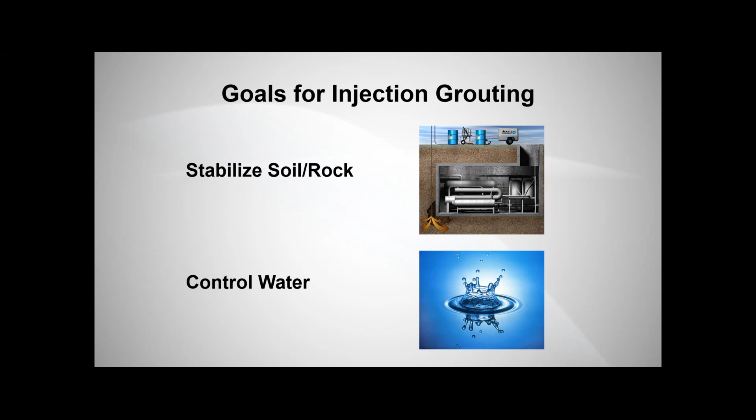What are the goals for injection grouting? When we talk about injection grouting or grouting for water control or stabilizing soils, a lot of the jobs get in a lot of different aspects, whether you're controlling groundwater in a break-in, break-out on a shaft for a TBM, or if you're controlling groundwater on a shaft advancement for a mine, or groundwater in a manhole or a wet well or a basement underground parking garage. There's a lot of different projects that grouting gets used on, but when you boil down to what the ultimate goal is of the grouting technique or application, it comes down to either you're stabilizing the soil and rock or you're controlling the groundwater. So it really helps you understand what the injection grouting process does and what it accomplishes.

What are the injection grout families? Well, the primary grout families consist of cementitious grouts. That's your ordinary Portland type 3, or type 1-2 also could be considered a cementitious grout. Ultrafine grout is another family within that, and we're going to go into a little bit more detail on each one of those. Then you get into solution grouts, which is what I'm calling what people call chemical grouts, but solution grouts are the industry term which we're going in that direction.

These are the polyurethane grouts, one part of the subset of the solution grout family. Within the polyurethane family, you have a hydrophilic and hydrophobic. And what differentiates, real quick, between cementitious grouts and solution grouts is particulate versus non-particulate, if you will. Cementitious grouts have particles. Type 1-2 could have anywhere from 75 to 100 micron size particles. Type 3, 15 to 20 microns. These range a little bit. And ultrafine grouts, anywhere from 3 micron average up to 8 micron average, depending on if you're looking at an ultrafine or a microfine, and as low as 1.5 if you're looking at a superfine. So again, particulate grouts for cementitious, solution grouts non-particulate.

So to continue on within the family of solution grouts, the other subset, as that tree branches down in the family, the chemical reactive grouts - the acrylamides, the acrylates, the acrylics, and the sodium silicates.

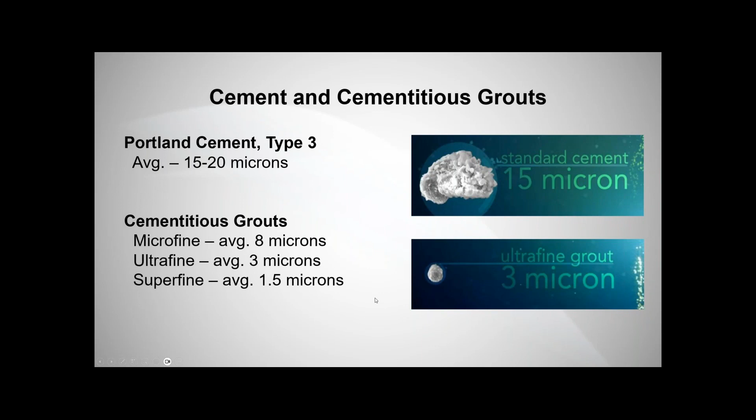So talking about the cement and cementitious grouts, again, ordinary Portland cement type 1-2 does get used. In this slide, we're showing type 3, average micron size - we're saying 15 to 20 microns here. To give you a size reference, we've got it here to the right. And then under the cementitious grouts, we've got the microfine average of about 8 microns, ultrafine of 3 microns, superfine at 1.5 microns. To put that in perspective, what does that look like, right?

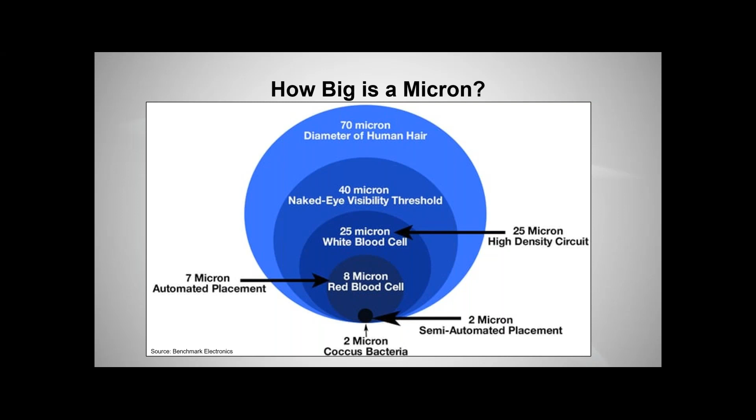The diameter of a human hair on average is about 70 microns. So if you feel your hair, okay, that's 70 microns. That feels pretty small, right? One hair. So if you think about 8 microns, that's the equivalent to a red blood cell, or an average micron of microfine cement. Then 2 microns, if you size that up by 1, will give you the average particle size of ultrafine cement. So to put that in perspective, 3 microns is basically the same particle size as smoke. So if we were to have a cup of ultrafine cement powder here, that's how it comes in, and I put my finger on it and tapped it, it would go airborne. Because it's so fine, that fineness or small average particle size helps its ability to permeate into soils, as well as into fine cracks and fissures and things like that.

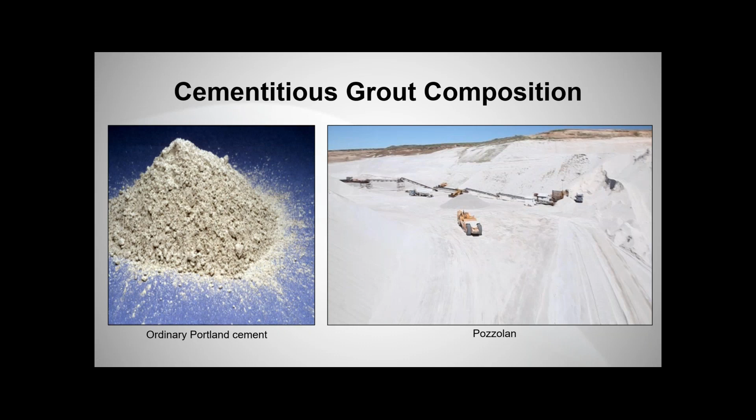These two components get combined together and get ground down to the particle size which we're trying to achieve. So why does the particle size matter?

Also, one of the other components that gets added to the mix when you're mixing an ultrafine cement and a type 1-2 ordinary Portland cement, or a type 3, is a superplasticizer, or another term in the industry is water reducer. What that does is actually change the charge on the particles within the mix and forces them to repel each other, making it very liquid, very fluid. So you can take something that's relatively sticky with a low water cement ratio, add a very small amount of this chemical, a superplasticizer, and it'll make it look like a pancake. It's pretty fascinating to watch. I think we have a video of that on our website.

But particle size and superplasticizers help allow the ultrafine cements to become very fluid-like.

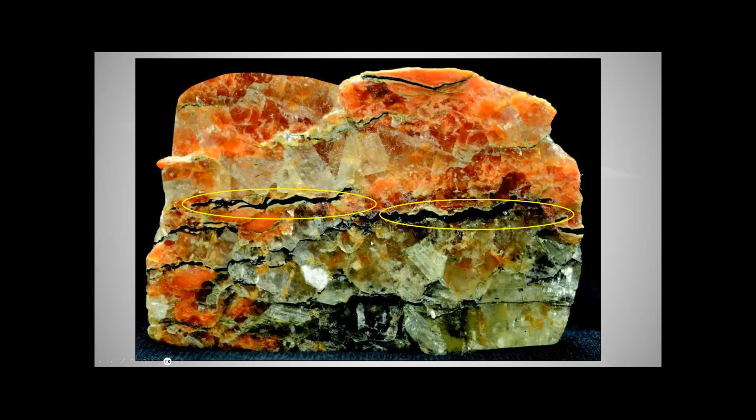An example of how they can penetrate into small fractures and fissures. The black happens to be ultrafine cement. It just happened to be how the picture turned out here, to be black in the fractures and fissures.

So jumping into polyurethane grouts now, if we're going to jump into the solution grout family.

Again, polyurethane grouts are made up of hydrophilics and hydrophobics. Hydrophilics have a strong affinity for water - think of hydro, that's water, philic likes to be filled with water. Hydrophilics were the first grouts to be invented, single component. When they interact with water or mix with water, they react and cure. Hydrophobics, on the other side, still react with water for the most part. There are some that are A and B that will react together. But think of phobia, fear - they have little to no affinity for water.

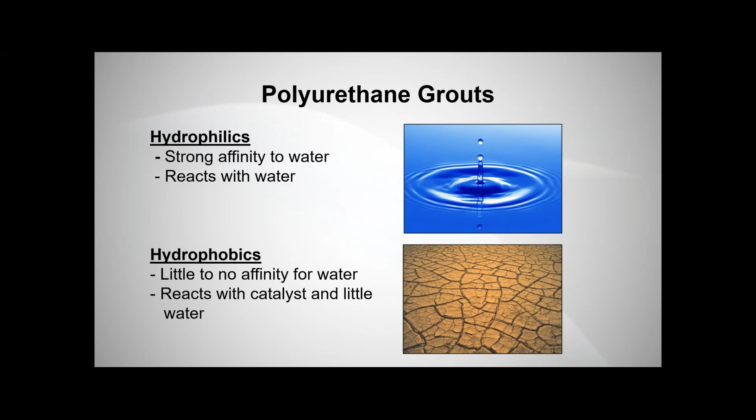They use a little bit of water to react for the most part, but then they become not affected by wet, dry seasons, things of that nature. And so hydrophobics are often mixed with a catalyst, or in the industry an accelerator, and then injected, and that little bit of water in the soils or moisture in the soils will react with the grout. Again, there are hydrophobics that are 1-to-1, part A, part B, that react on that chemical reaction.

Polyurethane grout viscosities can range from as low as 35 to 50 centipoise to as high as 3,000. Water being 1 centipoise, to put that in perspective - the lower the number, the more fluid the material is. 3,000 centipoise is like honey, to put that in perspective. The reaction times can be as fast as 3 to 4 seconds - that's a chemical reaction type material where you have a part A and part B - to a high range of 30 to 45 seconds, whether it's a single component or a hydrophobic with an accelerator. They are sensitive to temperature, so the colder it gets, the longer it takes to react. The warmer it gets, the faster it reacts.

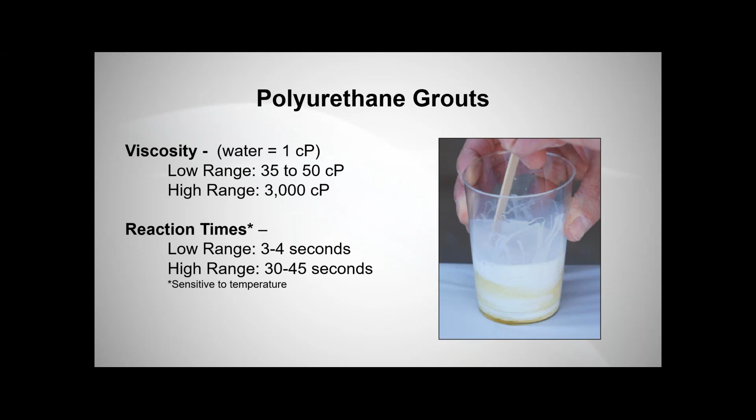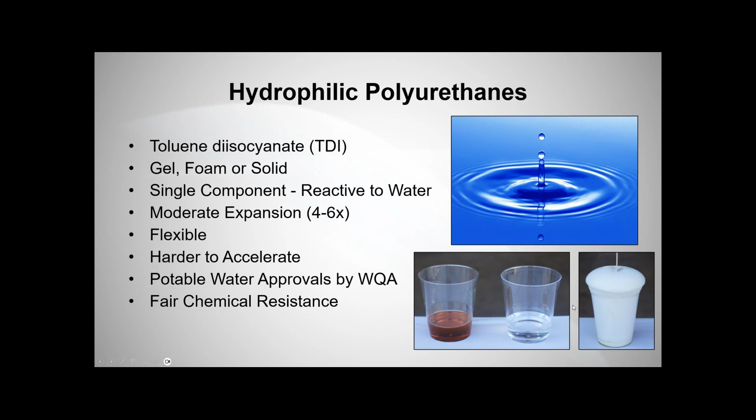Hydrophilic polyurethanes, again, the first to be invented, are toluene diisocyanate, or TDI. They can make a gel, a foam, or a solid. They're single component, as I mentioned before, typically with moderate expansion, 4 to 6 times, or 400 to 600%. They're generally flexible. They're hard to accelerate because they're single component - they react with water. A lot of the products in the market space have potable water approvals by WQA, or meet NSF 61 potable water approvals, and they have a fair resistance to chemicals. Here's an example of a single component mixed with water that expands and creates that flexible foam type material.

Hydrophobic polyurethanes are methane diisocyanates, or MDI. They can create a foam or a solid. They tend to have much higher expansions - as low as 4 times up to 30 times, or 400% up to 3,000%. They're dual component - they can be a resin with a catalyst, typically a hydrophobic resin with an accelerator. We call it a catalyst because that's the technical term, but it is called an accelerator in the industry. Water is the reactant to help drive that, and there is a resin to resin chemical reaction sometimes on some of the hydrophobics as well. They can be flexible to semi-rigid to rigid. They can be accelerated by adding more accelerator or catalyst. They also have potable water approvals that meet NSF 61 and good chemical resistance.

Here's a chemical reaction, one part A and one part B. That's a 1-to-1 mix with a 30 times expansion. It blew its way, it just topped out like lava out of the cup.

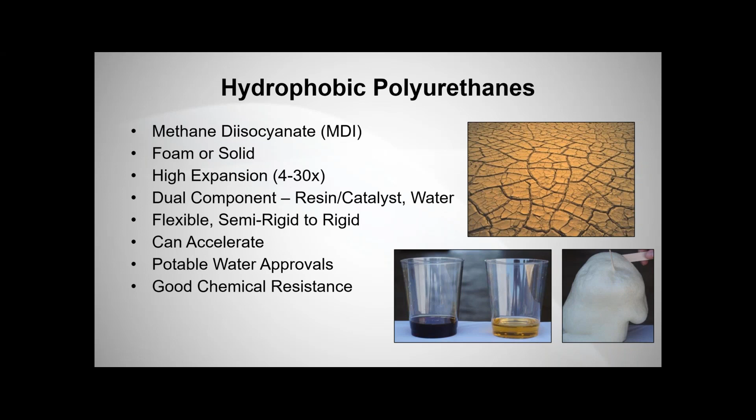Thank you, Britt. So continuing on with the solution grouts, we're going to look at the chemical reactive grout family now, which consists of acrylamide, acrylic, acrylate, and silicates. All of these systems are 2-component, A and B, and generally used at a 1-to-1 ratio. Some multi-ratios can be utilized, but most commonly it's a 1-to-1 ratio.

These are also very low viscosity, with water being 1 centipoise. The acrylamides and acrylics are going to be 1 to 2 centipoise, so to the naked eye you cannot really tell the difference. Acrylates and silicates are still very low, but push up towards 3 to 12 centipoise. There are also some high solid acrylates that are even a little bit higher now, around 20 centipoise.

Due to that low viscosity, partnered with the fact that they do not have any particles, as Britt mentioned, these products are able to permeate anywhere that water can travel. So pretty much many different types of soils, cracks and fissures - if the water can travel through there, these products are going to be able to penetrate and travel in as well.

They have controllable set times - the acrylamides, acrylic, and acrylates can be adjusted anywhere from just a few seconds all the way up to many hours. We say 10 hours here. Once you get past that, you start to lose a little bit of control on the gelation range, so it may be a wider range where it sets.

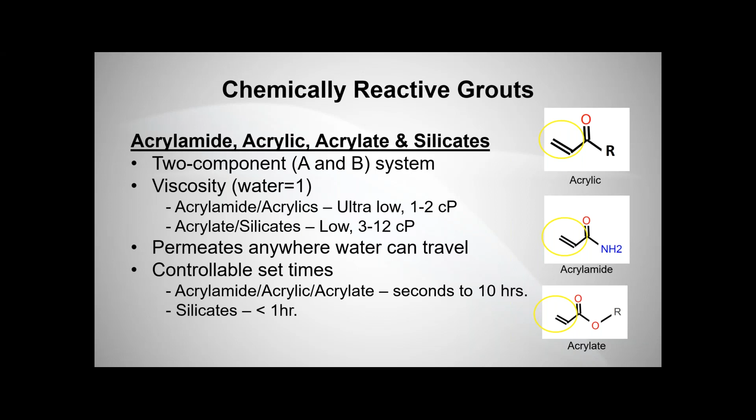All right, so the chemical reactive grouts - just a few pictures to show how these work. 1-to-1 ratio, same viscosity as water. Here we've dyed part A and part B, one blue, one yellow, so when they combine they turn to green. This is important in the field to make sure that the pumps, which are at a 1-to-1 ratio, are actually pumping properly.

We're getting both components. Additionally, these products, if the dye was not in them, are crystal clear - they look just like water, you can't differentiate them. So obviously, if we were stopping water, we don't want to be pumping grout and not be able to differentiate it from the water infiltrating into a structure. This gives us a means to differentiate and adjust our set time if we have too much waste or if we're losing material and having it go where we don't want it to.

With these, there's no expansion like with most of the polyurethanes, so what you pump is what you get. If you pump 1 gallon of A and 1 gallon of B, the ultimate product is only going to yield the 2 gallons that were pumped. Non-toxic when cured, they're great for controlling water.

As you can imagine, if you have water traveling through the soil and then it turns to a gel, it's filling all that pore space between your soils and blocking off the pathway where water can travel through. So very, very good with water control. And the acrylamides actually now have the NSF 61 potable water certification as well.

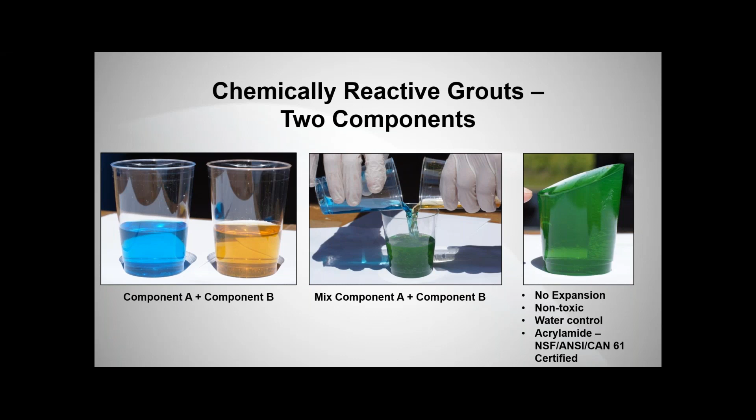Move on to the next slide.

When we look at the acrylamides, our AV100 is a mix of acrylamide and methylene bisacrylamide, or MBA. These are organic based and have been used since the 1950s. In grout applications, they were originally developed for seepage management around dams and reservoirs. You put in a new concrete dam, concrete holds back the water, but what about the surrounding soils? That's where they were originally developed.

Since then, they've expanded into many different market spaces. They have a long design life. The Department of Energy did extensive testing on our AV100 at a 20% grout concentration for hazardous waste contamination and encapsulation in Oak Ridge, Tennessee. Through that testing, they found that in the soils, the AV100 had a 362-year half-life. So once it's there, it's going to be there for a long time.

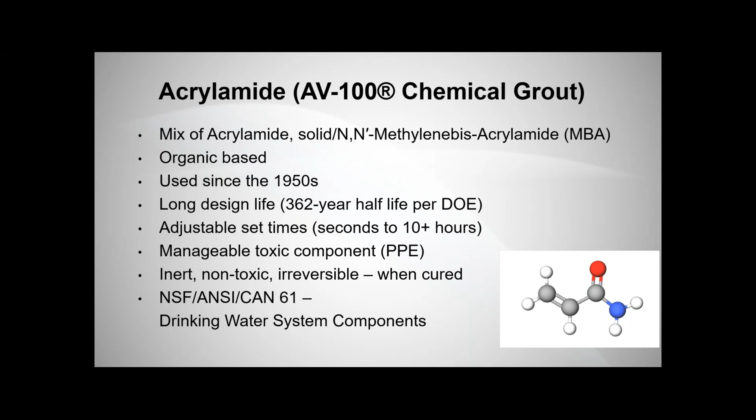We mentioned adjustable set times, so a wide range, very beneficial depending on the soils and application. Manageable toxic component—all of our customers and anybody working with these goes through training on proper PPE and management. It's inert, non-toxic, and irreversible when cured. Once the acrylamide turns to a solid, the chemical has actually changed—it's turned to a polyacrylamide. It's important to know that once it cures, it has changed, because polyacrylamide is very different from acrylamide. The cured product has NSF 61 certification for potable water use.

Acrylates are also organics. They've been around since the 1980s and are a variation of acrylamide, just a bit more refined. These are also used for controlling water—they're a solution grout that turns to a gel, very similar products with short to medium design life. I believe that same Department of Energy testing established somewhere between a 75 to 100 year half-life on these products. They also have a wide range of adjustable set times and a non-toxic component, with the same PPE requirements as the acrylamides.

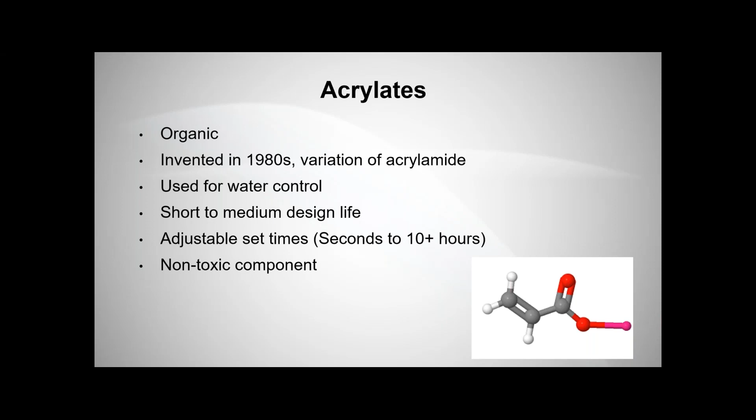Then sodium silicates, or water glass. These have been extensively used and have been around since the 1800s. They are inorganic, and in the industry there's a little bit of contention—it's widely considered to be temporary, and the expectancy really depends on the geology and what's there. Some people say 10 years, some say 20 years. There are differences between the reactants used with it, which can adjust that as well, but generally they're considered temporary.

They're used for excavation support and underpinning, with good compressive strengths, but generally not used for water control. For water control applications, you have to use a very high concentration of sodium silicate, and as you pump into groundwater conditions, you can wind up with mixing of the groundwater and the product, causing some irregularity. These are also susceptible to syneresis depending on the reactants used, and generally have a shorter set time, so a little less variability there.

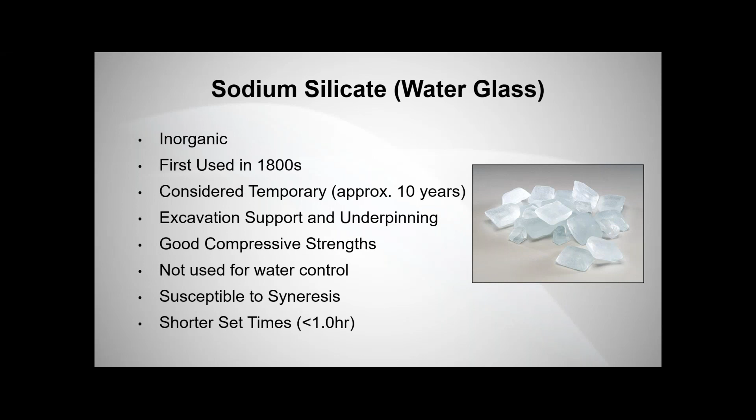Moving forward, I'm going to go into where injection grouts are used. Hopefully now we have a pretty good basis of the different products and how they're used, but we're going to dive into it a little bit more here.

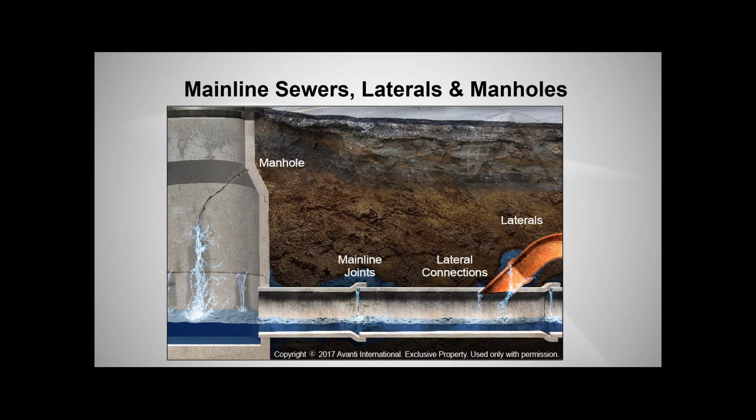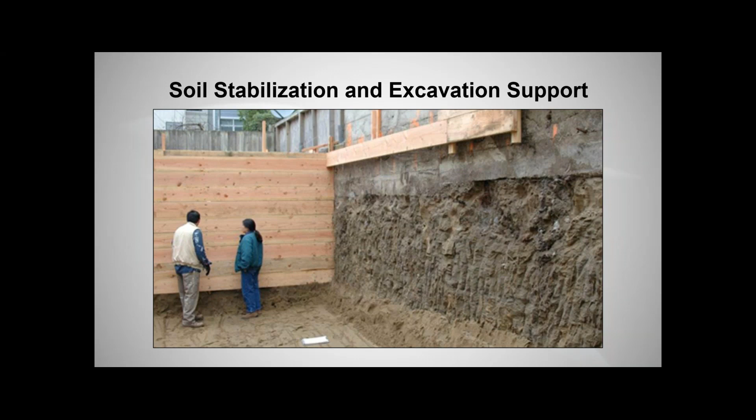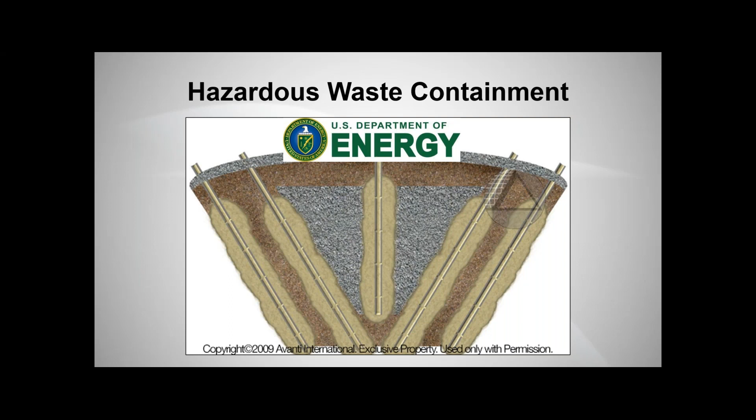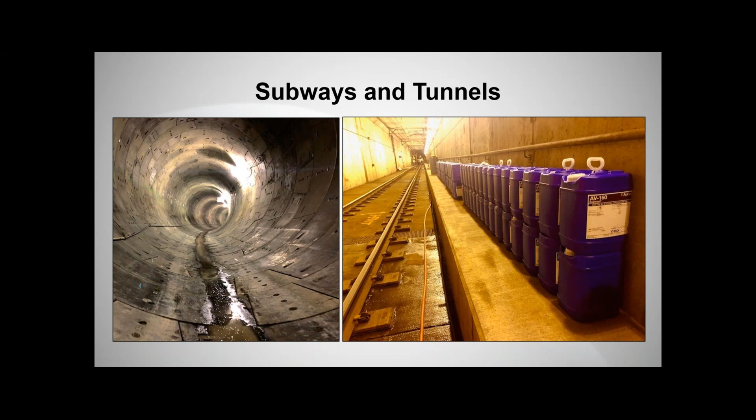So let's move forward on that one.

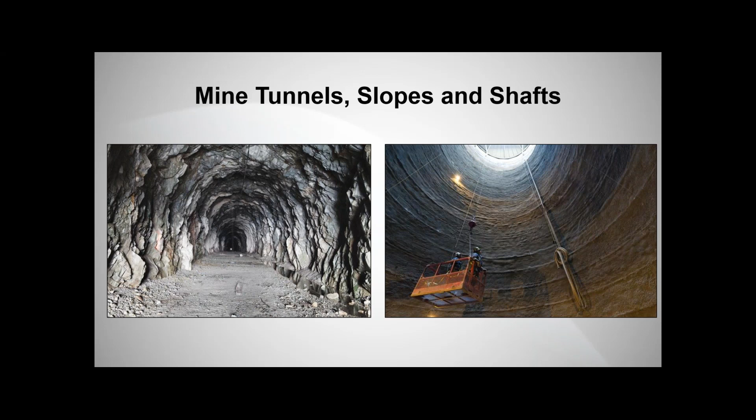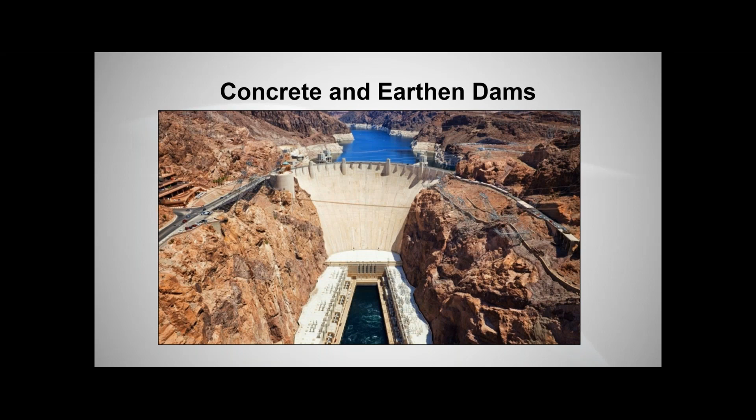Mines, tunnels, slopes, and shafts. I'm sure you're seeing a general theme here. Anything below grade that is susceptible to groundwater where you don't want it, these products are used. So mines, tunnels, slopes, shafts, adits, all of those are included. Concrete and earthen dams, we touched on those before, everything from the drainage gallery to the surrounding soils and everything in between.

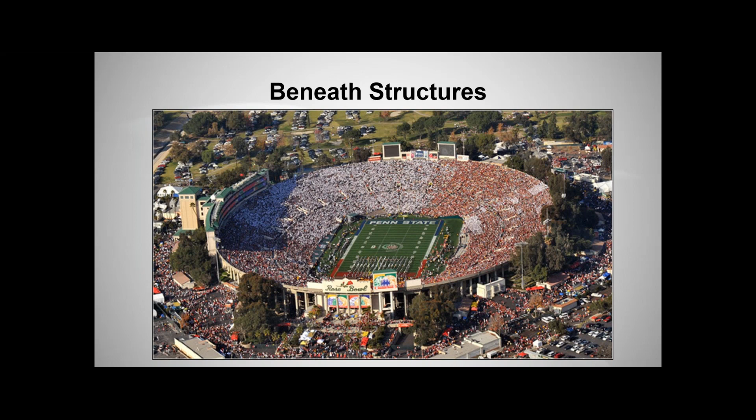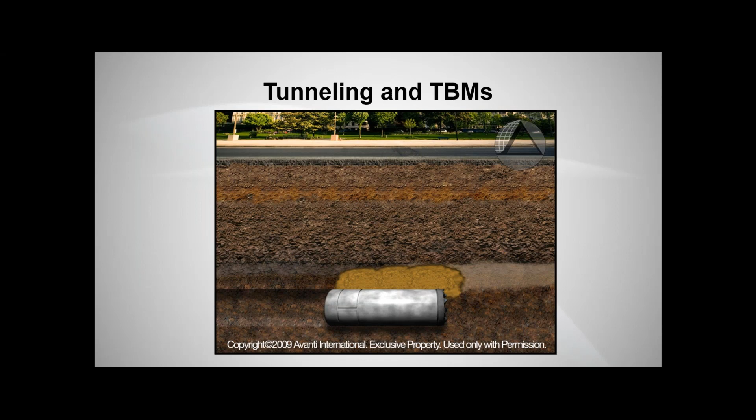Break-in and breakout shafts, we're working on a few of these right now with a couple different customers. Tunneling and TBMs, I could dive into this animation, but I don't want to take away from the project we're going to be talking about, so we'll keep moving forward here.

Pre-excavation and dewatering. Oftentimes on large shafts or excavation jobs extending into the groundwater table, if it's a large project, it's going to be open for a long time, and dewatering may become cost prohibitive. In some of those situations, if the geology dictates, injection grouting can be used to create a water barrier around and beneath the structure so that dewatering isn't necessary, providing additional control on these types of projects.

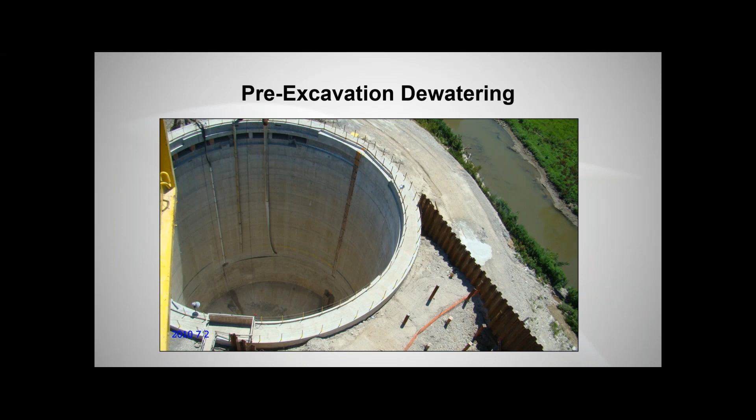And then today's focus, geotechnical grouting and tunnel grouting. This is where I pass it off to Ken, the exciting part of the presentation.

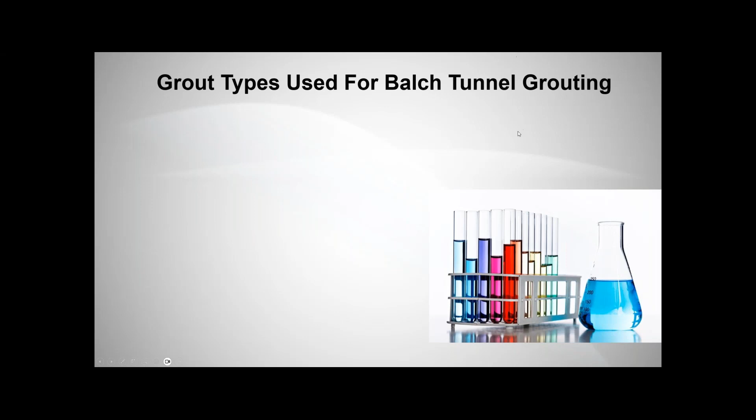This project was a happy place for grout suppliers and grouting consultants. Cementitious grouts were used for shaft construction. Cement grout was used to stabilize the coarse grained soil, and ultrafine cement was used to stabilize running sand conditions on the tunnel. Every species of solution grout except sodium silicate was used.

And polyurethane grout was used to seal the cracks and construction joints in the structures all over the project. Chemically reactive grouts were used to seal cracks, and both acrylamide and acrylate grouts were used to control groundwater at various locations.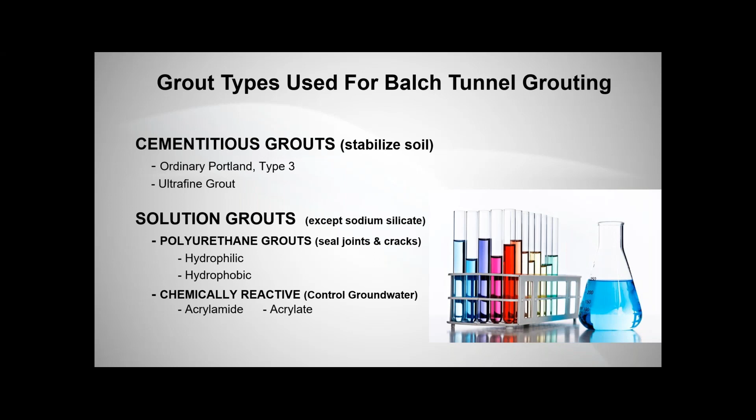I have to go back one. Do we have a way to go? There we are.

Once again, it's not changing for me.

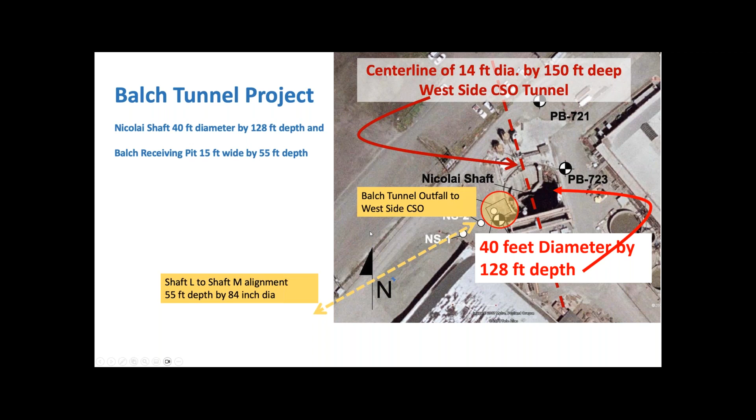And this one isn't, there we go.

Also on the project, there were 2 tunnel interventions required. The second tunnel intervention was to replace the cutter teeth on the tunnel machine. The first intervention was immediately after we broke out of shaft L, when the tunnel machine went offline and got stuck. This is the intervention that we're going to focus on today.

Before we go into the design of the tunnel intervention, I want to give a little project overview. All the tunnel access shafts were originally designed with jet grout soil modification around the shaft. But taking into account the problems at shaft M, the contractor, J.W. Fowler, proposed an alternative construction method using the cutter soil mix system for consolidation of the ground at the shafts.

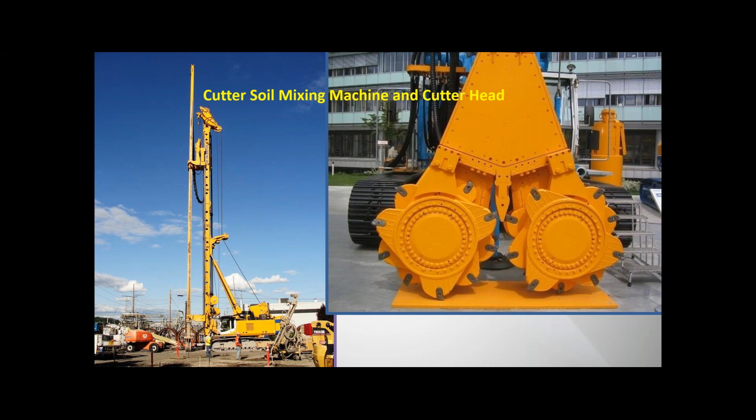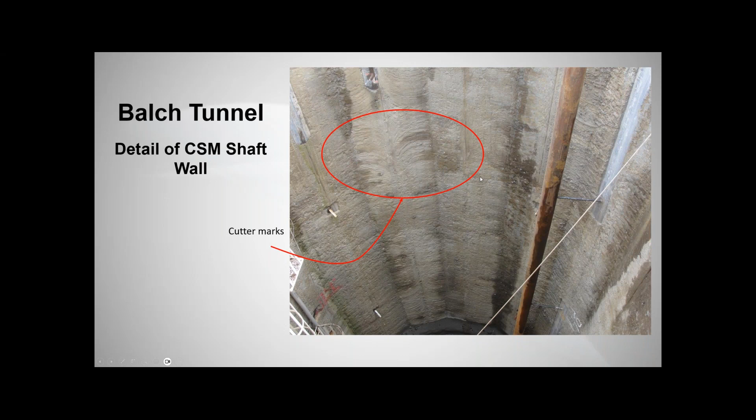There's an airlock in the trailing gear behind the tunnel machine, which can be used to keep water from entering the tunnel and flowing back to your launch pit. Also, it gives you a way to access the interior of the machine in an emergency.

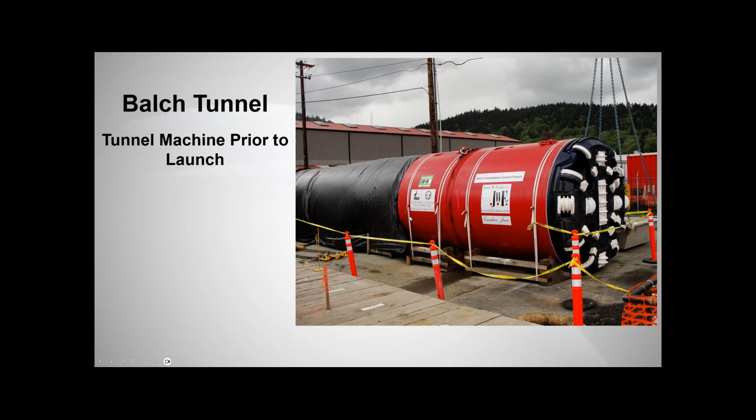The cutters have to be designed for the anticipated ground conditions, and they're intended to operate for the full length of the push, because it's very difficult to go in and change the cutters as you're going along. So you need to know and understand the geology you're going to encounter, even more so than what you'd get from just looking at the exploration boring logs done for the tunnel. So I'm going to say a little bit about the regional geology.

The project is located in a geologic structure known as the Portland Basin. The basin is a faulted and folded syncline located in Oregon and Washington at the confluence of the Columbia River and the Willamette River. The basement rock is Columbia River Basalt Group, and at the west margin of the basin, the basalt is uplifted along a fault known as the West Hills Fault, which goes right next to the Balch Tunnel.

The Columbia River basalt is overlain by alluvium deposited in the old Columbia River and Willamette River valleys. The bottommost unit is known as the Sandy River Mudstone. Above that is 100 to 350 feet of well-consolidated sandstone and conglomerate called the Troutdale Formation. Overlying the Troutdale Formation is flood deposits comprised of cobbles, gravels, sands, and silts. The flood deposits are known as the Missoula flood, and they're embedded with alluvial fan deposits originating from the West Hills. Also, there are deposits of Mount St. Helens volcanic ash embedded within the Missoula flood.

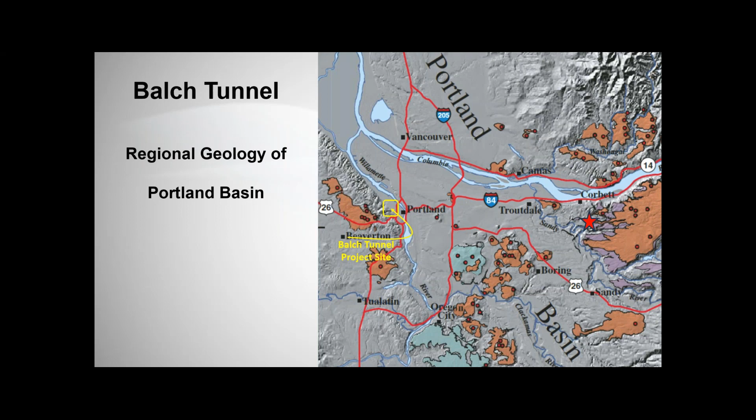If you're not familiar with the term Missoula flood, it refers to catastrophic flooding in the Pacific Northwest during a period of global warming at the end of the last ice age. The North American ice sheet blocked all of the drainage from the Rocky Mountains in this area and formed a lake estimated to have been about 500 cubic miles of water. It's a very big amount of water. To put that in scale, it's enough to cover the entire metropolitan area of New York with 765 feet of water.

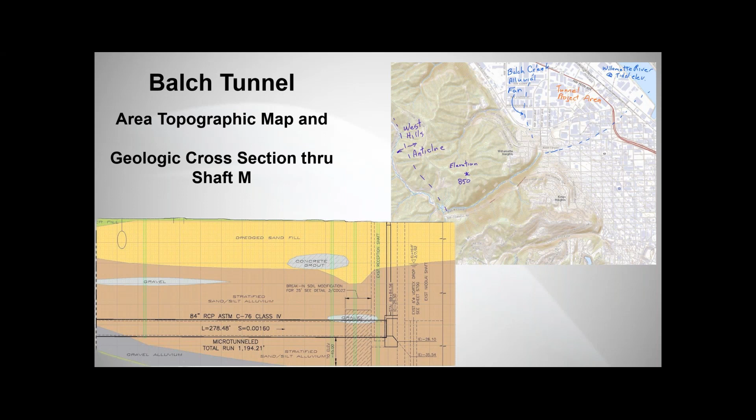At Shaft M, we ran into an undetected deposit about 10 feet thick of Mount St. Helens ash that had been washed into a low spot sometime after the eruption. It was a sedimentary deposit, but almost 100% Mount St. Helens ash.

When the CSM rig hit the blue-green unit, it stopped cold, pulled it up. There were large cobbles wedged in between the cutter wheels. So he cleaned it out, put it back in, and got the same problem again. Eventually we concluded that whenever we got to the cobbles, they would just roll underneath the cutters until they wedged it up, and they weren't being ground up. So we had to do something to stabilize the cobbles in place well enough that the cutters could get through it.

So this area was grouted using cement bentonite grout, and that stabilized the cobbles, held them in place so that they could be cut up.

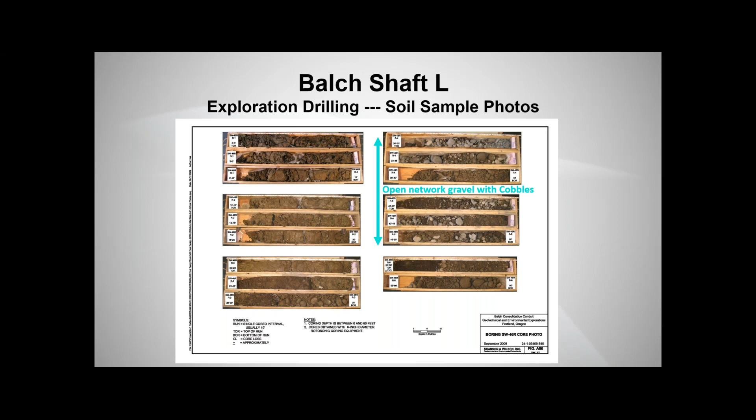During the excavation, we were able to go in dry and look at the cobbles, and we found that they were actually distributed with thin layers of gravel and sandy material between layers of cobble. But we were able to get through it and get the shaft down.

The geotechnical report also indicates that right here, the blue-green layer is repeated underneath the tunnel grade. When we looked at the bottom of the shaft, we found that there were cobbles. The material was somewhat different than shown in this, but the tunnel machine manufacturer concluded that they could push through this and just modified the cutters a little bit in order to get through it.

This is the only exploration sample that I have that showed any of the cobbles at all, and these were very, very small compared to what the as-built condition was. In the as-built, we found cobbles up to 24 inches in diameter. Unfortunately, I don't have any photos that we took in the bottom of the shaft.

Once we launched the machine, progress through the stabilized material and the breakout block was as expected. Cutting return was normal. Everyone uncrossed their fingers and went home, taking a nap. As soon as the machine broke out of the breakout zone, it advanced about 10 feet and went offline, just way offline, jammed up and couldn't be pushed forward or pulled back.

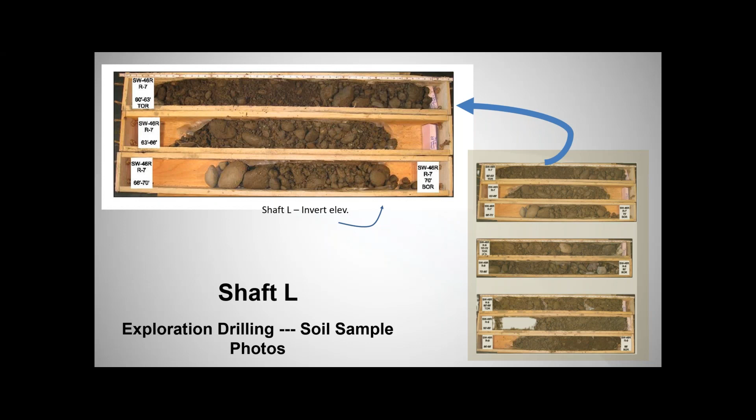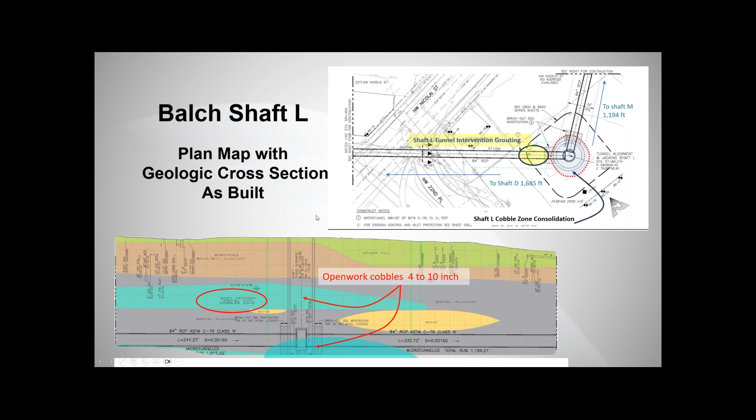Design of the tunnel intervention grouting is dependent on a thorough understanding of the ground condition and the properties of the grout. Permeation of the cobble material was successful in the shaft, but there were strings of gravel and sandy material that didn't get permeated with cement bentonite at all, and we didn't think that would hold air very well.

So we set out looking for a different kind of grout material. The criteria we had to meet were low permeability and control of placement location, the strength of the grout, no type 1 or type 2 errors, and we had to be able to advance the machine after grouting.

There were some other factors we had to consider, but they aren't included in the criteria list. These are availability of the necessary grout quantity, suitable mixing and pumping plant availability, drilling injection ports, and skilled labor. And finally, we need to get the owner and the project engineer of record on board with whatever material we selected.

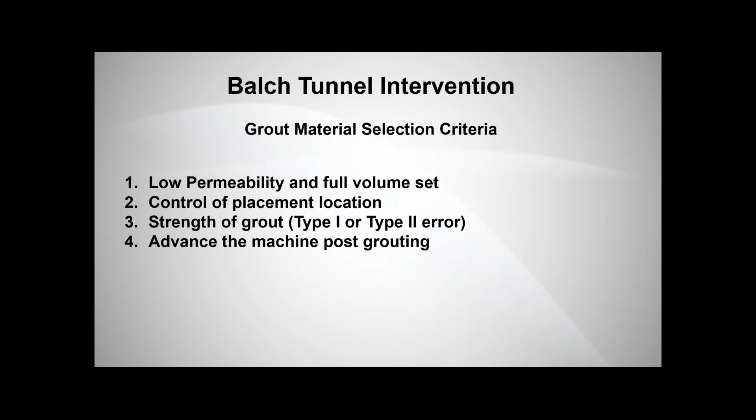The pattern is based on 4-foot diameter columnar injection zones with 25% groutable pore volume. That's 2 gallons of grout per cubic foot of soil. The holes are laid out with 44% overlap between columns, and the injection points are 2 feet 9 inches center to center. In the 2 rows ahead of the machine, we skipped the bottom injections so that we wouldn't have to mine out grouted material in front of the machine.

The outer rows were grouted first, and the inner rows were used to close up all of the gaps and form a lid above the tunnel. We only used 1 row right or left of the tunnel, but we used 3 rows of injections above the crown in order to make sure that we didn't have any vertical migration of the air bubble.

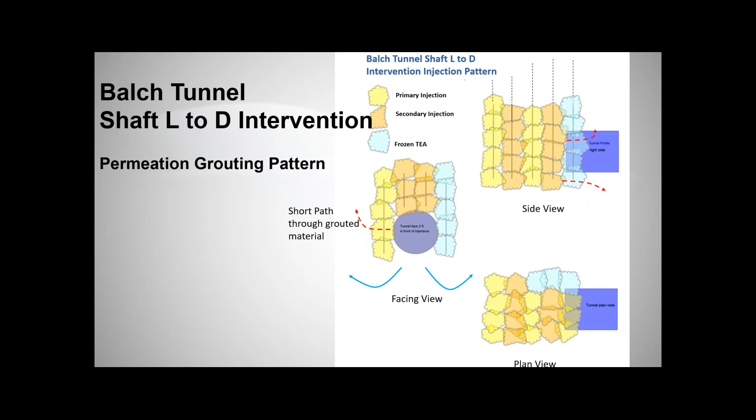The key parameters for groutability of the material are the pore aperture and the total pore volume. The pore aperture is actually equivalent to or approximated by the D15 of the soil. D15 means that 15% of the particles are smaller than this number, 85% are larger.

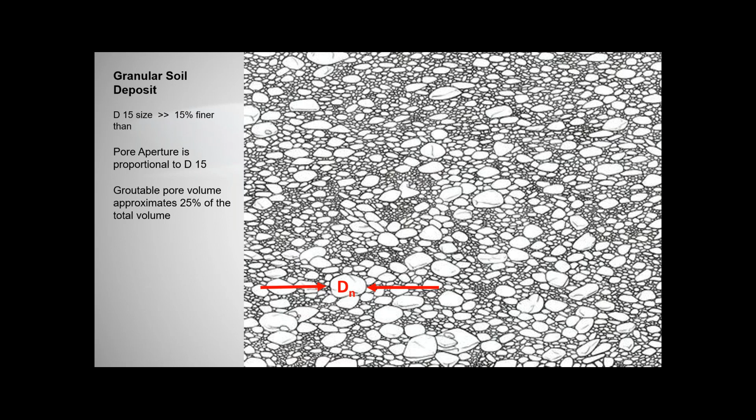The groutable pore volume of the soil is always less than the actual pore volume. The reason is that some pores are too small for grout to get into, some groundwater remains trapped in the pores, and there's some dilution of grout by the groundwater as the injection is going on. But for most cases, 15 or 25% of the total volume is a good estimating number for the total pore volume that you're going to grout. 25% is equivalent to 2 gallons per cubic foot.

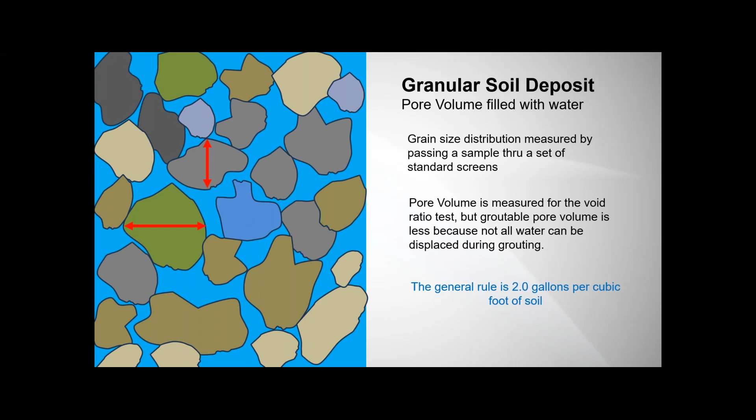The pore volume is almost constant in granular soils. If you look at this illustration, if I expand each of these particles by the same amount, the pore space in between has to expand by the same amount. So once you determine the pore volume, it's constant whether you go from the finer grain to the coarser grain portions of the project.

The pore aperture, however, is completely dependent on the grain size, and it's equal to the D15 of the grain. So if we go from sand, which has a D15 of about 3/1000ths of an inch, to the cobble zone where it's 3/100ths of an inch or more, the permeability increases with the cube of the pore aperture. In this case, going from sand up into the cobble zone, we get a permeability increase of over 1,000.

In preparation for grouting, you need to drill a hole into the soil deposit, insert a porous port of some sort—there are many different styles of ports—and then the grout is injected out through the walls of the port.

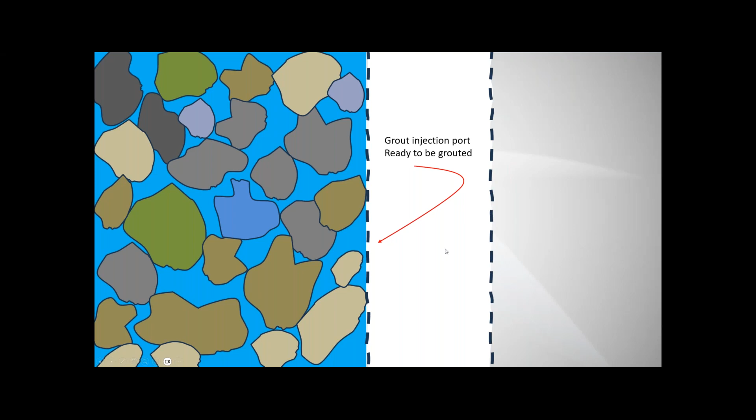This illustration shows grout in the injection port. There's some dilution of grout as it spreads, and the distance it travels is related to the volume of grout pumped in by this equation: D equals the cube root of the volume divided by 0.524.

This is true for isotropic, or uniform, deposits of material where the soil permeability is approximately equal in all directions. If we're in stratified deposits, the permeability can be up to 10 times greater horizontally than vertically, and you would actually have a square root term in this equation instead of a cube root. But for this project, the deposits have very uniform permeability, so I used the cube root equation.

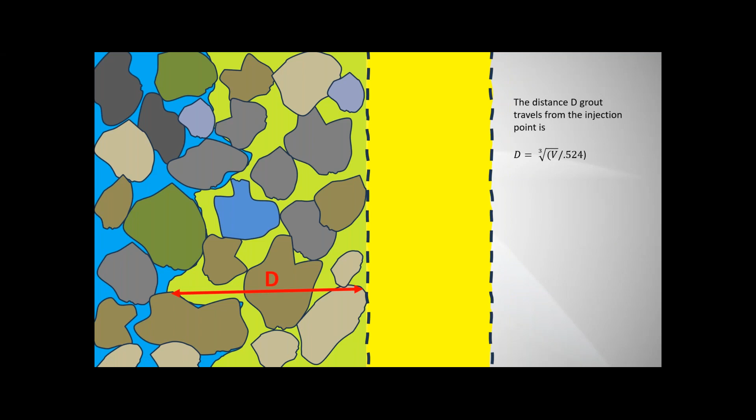Going back to this slide, I added a model of single point grout injections. Keep in mind that the actual injections are a lot more irregular than this, but they follow basically this pattern.

The first step in the layout is drawing the shape of the grouted material zone. Then you lay out a group of small diameter injections throughout the zone. It's a matter of experience about what diameter to use, but as a general rule, it runs between 3 and 6 feet in diameter.

The spacing between shots should be arranged so that a primary and secondary pattern like this is used. You inject the primary points, and they more or less confine the secondary points. When you go back to inject between them, the grout is forced to seek out pathways around the primary shots, filling up the zone much more thoroughly than an isolated single point shot in an undisturbed area would.

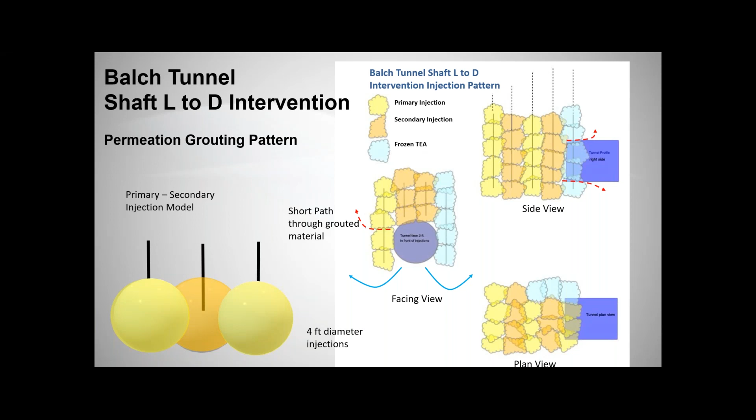The grouting turned out to be 100% success on this project. We completed the work about 6 hours ahead of schedule, and we were under budget. That's always good to be under budget.

The work started during very cold weather. One of the chemicals was exposed to cold on the way to the job and it froze up, so it had to be melted. We had to track the injections where the material froze in order to be confident we didn't have any problems. It turned out that was a non-issue, by the way.

The injection ports were drilled using typical rotary percussion drill rigs and 101 millimeter tooling. The injection pipes were lowered into the hole by a crane after the drill steel was extracted. Then the annulus between the pipe and the ground was filled by washing a fixed quantity of sand down the hole. Sand is pervious to the grout and helps control it entering the ground at the right place.

The injection pipes were black steel, Schedule 40, merchant couplings, in 21-foot sections coupled together. Then a pulling head and hose connection was hung from the crane and connected to the end of the pipe for each injection. As soon as a fixed quantity of grout was pumped down the hole, the crane would lift the pipe to the next stage, and we'd make another injection.

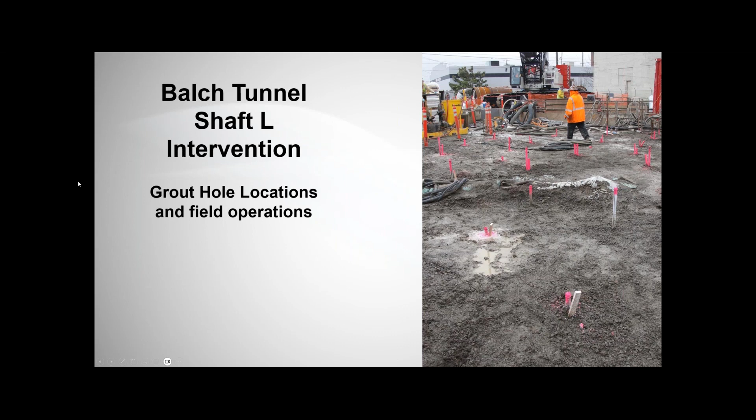The injection work was completed on a Saturday night shift, and 4 hours later the tunnel machine operator started pumping air. After a couple of hours, pressure built up, the rate of air loss stabilized, and the divers arrived on site Monday morning. The first entry was completed by noon, and the bubble in front of the machine was maintained through the entire work period of 5 days after that, with no significant change in the rate of air loss.

When the divers succeeded in loosening the machine, it restarted, and after about 30 feet we broke out of the cobbles and went into a new surprise, which was Mount St. Helens ash, which never showed up at all on the exploration logs.

I have to go back. Is there some way? There we are. We go back to this map. I want to show this slide for a moment because we did hit this Mount St. Helens ash, and it continued this way, and it's very abrasive, and it began to wear out the cutter teeth on the machine. We got down about this far, and this area was held up by eminent domain.

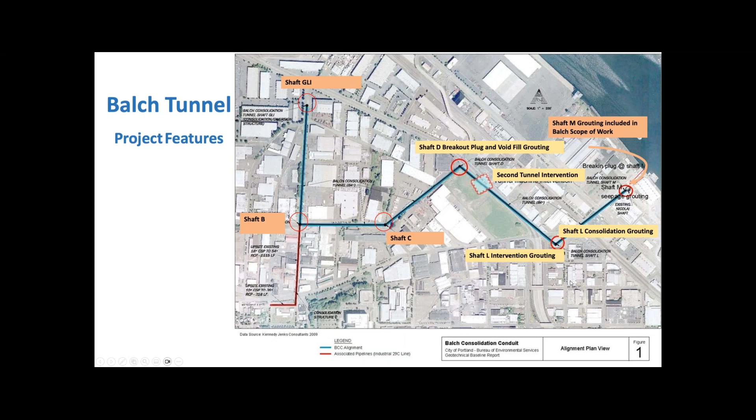So with that said, the end.

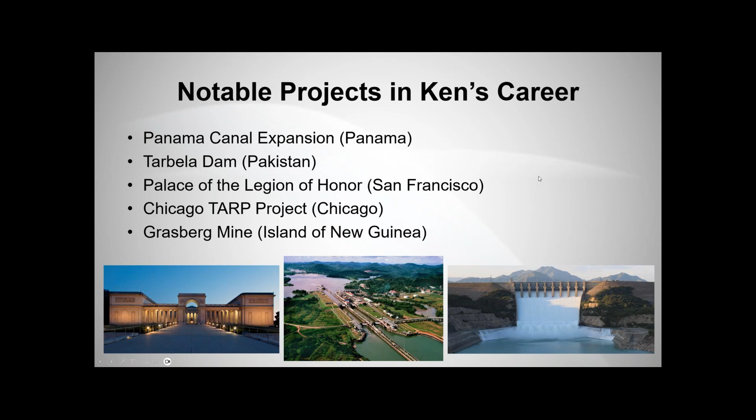And with that, I'll turn it back to Britt, Jacob. Yeah, thank y'all. Go ahead, Britt.

Thank you, everyone. What a great presentation, Ken. I really enjoyed getting to see that. I think you were just wrapping that project up when I first stepped into injection grouting 13, 14 years ago, if I remember right. And I've had the privilege and the honor to get to be your friend, call you friend since then, and I've been grateful for that.